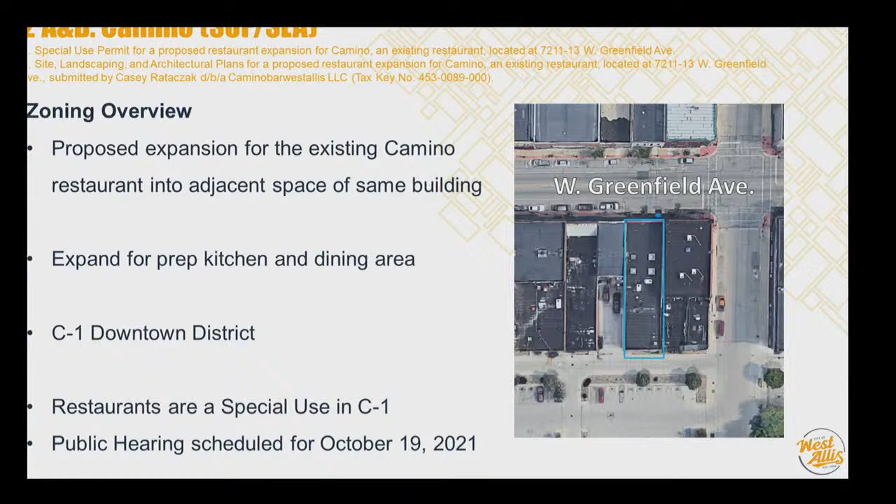They basically want to expand their room for their prep kitchen and dining area. This is within the C1 downtown district, and since restaurants are a special use in C1, they're going to have a public hearing scheduled for October 19th.

So just a little bit of history about the space. Its previous use was a vape shop, so they're gone, all of their signage is gone. And before that, it was Swords and Dreams, a reptile rescue shop where they used to sell all sorts of reptiles, iguanas, and katanas.

What else? Been working on that all week, haven't you? Well received, thank you.

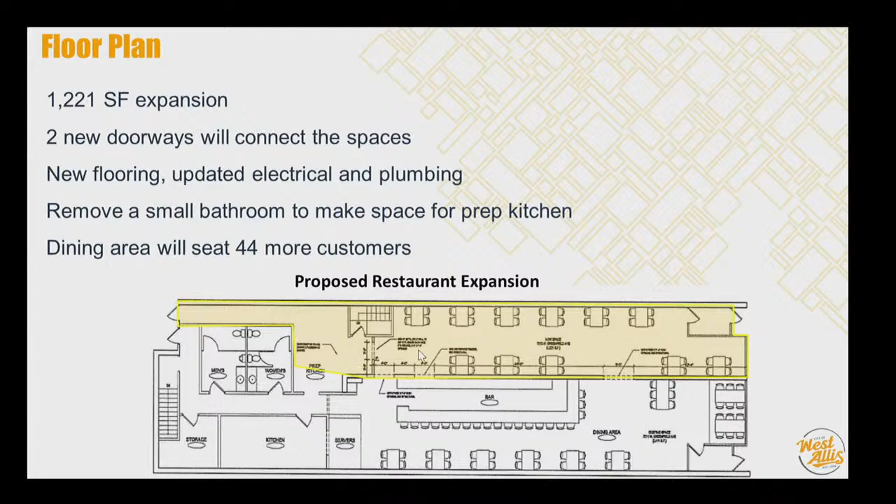So Camino's hours of operation will not be changing. Floor plan, well, they're expanding about 1,200 square feet and including 2 new doorways, which will connect the 2 spaces. In the new space, they're going to be updating the flooring as well as electrical and plumbing. And then they'll be removing a small bathroom located right around here to make way for the prep kitchen. This dining area will seat about 44 new customers.

There aren't any proposed changes to the exterior except that the signage has been removed and brought up to speed with branding for Camino, as well as the outdoor seating. So they've already moved their outdoor seating and added a few new spaces onto the sidewalk.

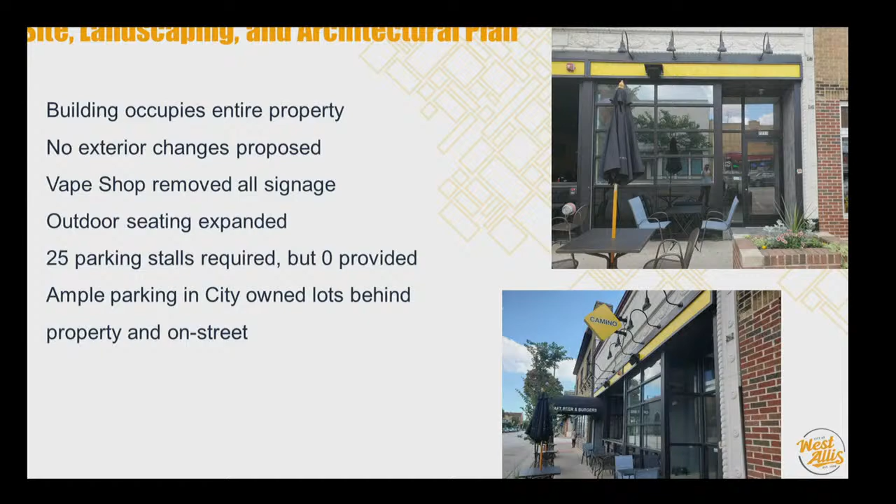The zoning code calls for 25 parking stalls, but since they are downtown, they have 0 provided. But there is ample parking around the downtown and the city-owned lots behind the property, as well as on the street. So we're asking for Common Council to waive this requirement. With that, staff recommends approval, subject to the approval of a special use by Common Council.

Thanks. Questions? Wayne? Thank you, Mayor. Tony, when we talk about the parking in the public area and street parking, and there are many other neighboring businesses that look at the same parking, don't we at some point in time have a conflict where there's not enough parking? Well, at this point, we haven't reached a point where we've reached parking capacity in any of the city-owned lots. I think if we ever do reach that, then we would have to reevaluate our downtown parking. But so far, we haven't reached that point.

And you would know that because tenants would be complaining? Tenants would be complaining, and we also keep a close eye, just being so close to everything here. We often commute down this alleyway and keep an eye on things. All right, thank you. Any other questions?

All right, so just to look at the floor plan, it's pretty straightforward. There's going to be about 100 feet by 120 feet with several different storage racks to hold the equipment and maximize the space for them. There's going to be 6 different garage doors along the eastern side of the building, as well as some service doors on the north and south.

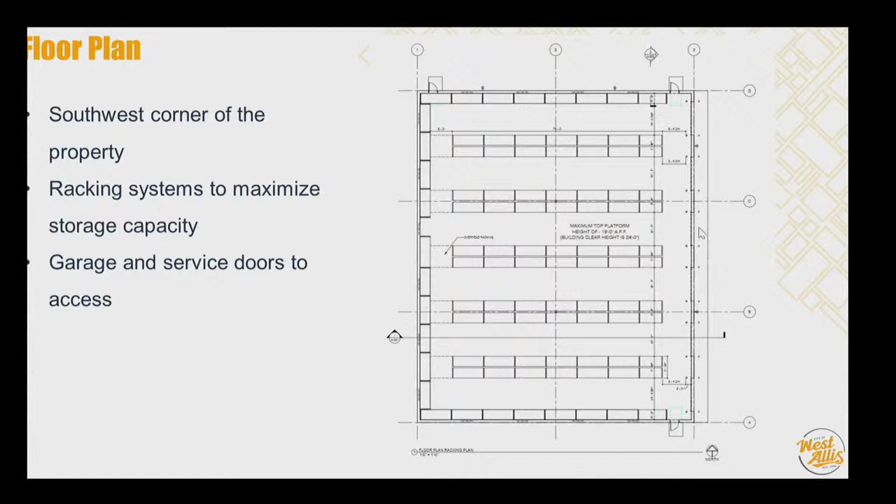Now looking at this site and landscaping plan, we worked with Lincoln Contractors to modify this a little bit and improve a few different areas, specifically some landscaping additions to the northwest corner. Some pictures of this right now.

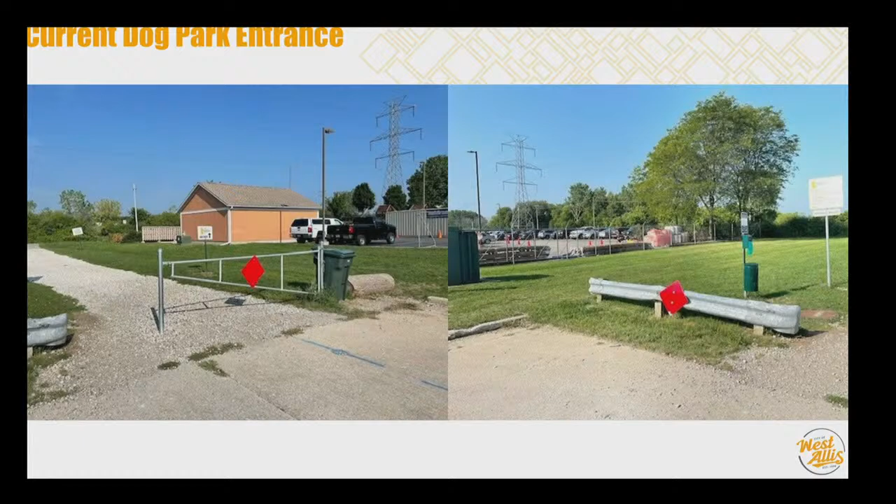This is the entrance, right next to the entrance to our dog park. As you can see, if you're walking in the dog park, you can see pretty clearly into the parking lot of this area, and it kind of doesn't fit some of the park qualities that we have there. So we worked with them to provide some amenities for people going to the dog park, including some benches on concrete pads, as well as 6 evergreen trees.

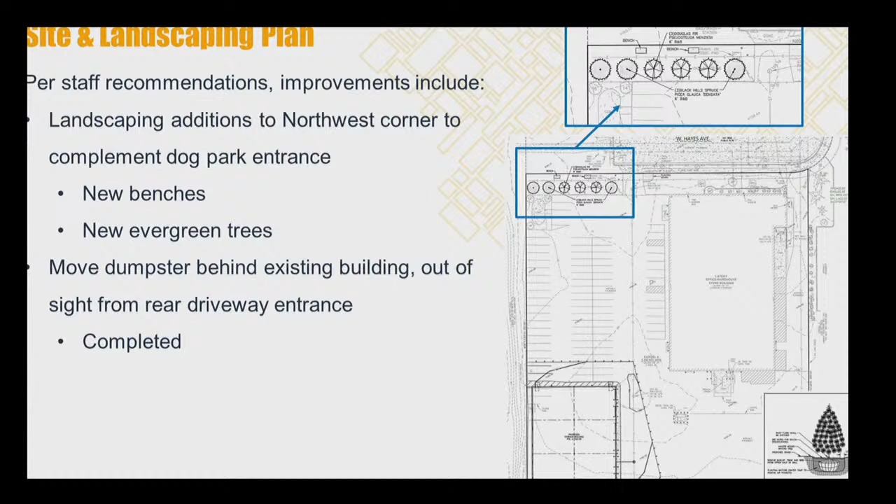The second item we worked with them on was to move the dumpster, which was currently in line with the western driveway you see right here, at the rear of the yard and kind of in sight from the street. We suggested that they move it behind the existing building to be out of sight, and they agreed, and that has already been completed.

Now looking at the architectural plan, the warehouse is going to be made from painted split-faced CMU blocks. You can see here we have the series of garage doors. Architecturally, there's this nice red stripe to break up the facade there. Above that, some lighting wraps around the building on each side. There's also going to be windows along the north, west, and south faces.

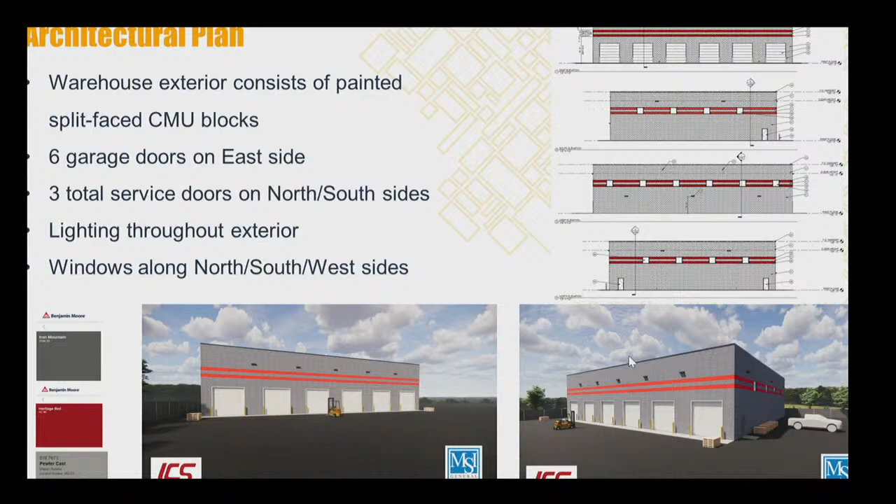Staff, for this project, staff recommends approval, subject to compliance with the stormwater ordinance. And so, yes, that's all. Any questions?

Rossi asked: How far back does that dog park go? Is it just that area right in the front? There are 2 parts to it - a small dog area and a large dog area, and in total it's about 5 acres of land. There's one entrance off of Hayes, and a second entrance off of Cleveland Avenue, which is about a quarter-mile hike from Cleveland north to the gated part of the dog park. If we had an aerial view, it's behind the police station, west of Lincoln Contractors, east of Hale, and north of Cleveland Avenue. So it's a fairly large area.

Is there a trail by that wooded area that you can use? Yeah, so there are 2 entrances to the dog park - one off of Hayes that was explained, and then another one off of Cleveland. So you could just park in the street on Cleveland near the practice fields and walk in.

So moved. Second. Any other discussion? Okay, all in favor? Aye. Anyone opposed? Ayes have it, motion carries.

Mr. Mayor, with your permission, I'd like to step back briefly to the prior item. I have a question for Tony - why is staff not requiring a surety bond? We deemed this project small enough to not require one, in terms of project costs, and they've shown good faith in making the changes we asked for, so we're not going to make that requirement of them. Generally speaking, almost always, we ask for bonds, right? Right, and if you recall at the last meeting, or maybe two meetings ago, we decided to do away with surety bonds as a requirement for every single project, and left that decision up to Plan Commission. All right, thank you.

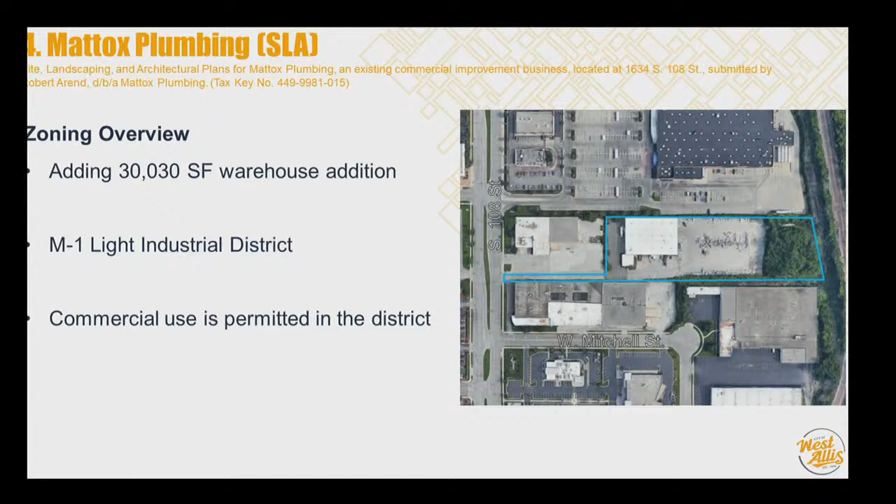Let's take up item 4 then. All right, thank you Mayor. Item 4 is Mattox Plumbing, and again we have 2 representatives from Mattox Plumbing here today with us. This project is at this address, just east of Highway 100. The proposal is to add an over 30,000 square foot addition to the existing building there, just to the east. This property is in the M1 Light Industrial District and is a permitted use. Their plan is to store some of the materials that they currently have outside in the yard in this warehouse.

The floor plan is pretty simple. This is essentially just an open floor with unfinished features added to the east side of the building, to provide some protection and additional security for these materials, which the company currently stores outdoors.

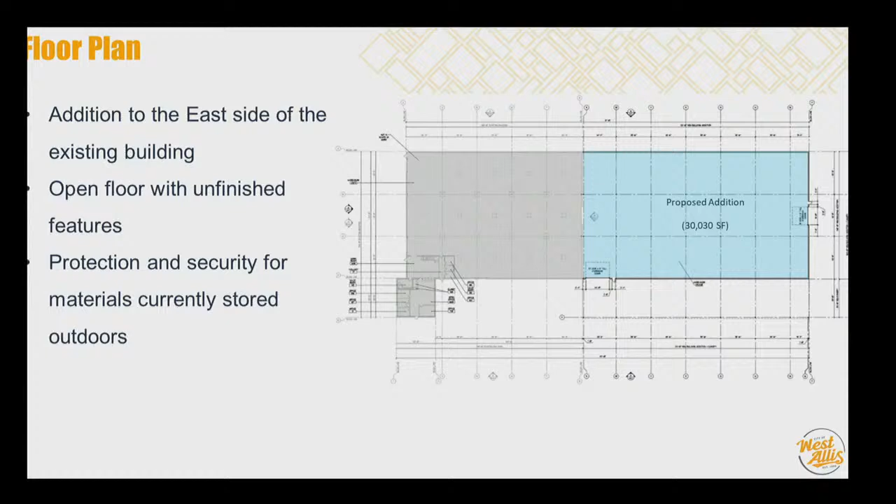Now looking at the site and landscaping plan, there are two main components highlighted here. The first is by this small office at the front of the building. There are a few different plantings there right now, and they're going to be replanting with new plants in these island medians in the parking lot, as well as on the west side of the office, plus a new planting bed on the east side.

They're adding a new planting bed to the west side. The more significant landscaping change is going to occur in the rear of the property.

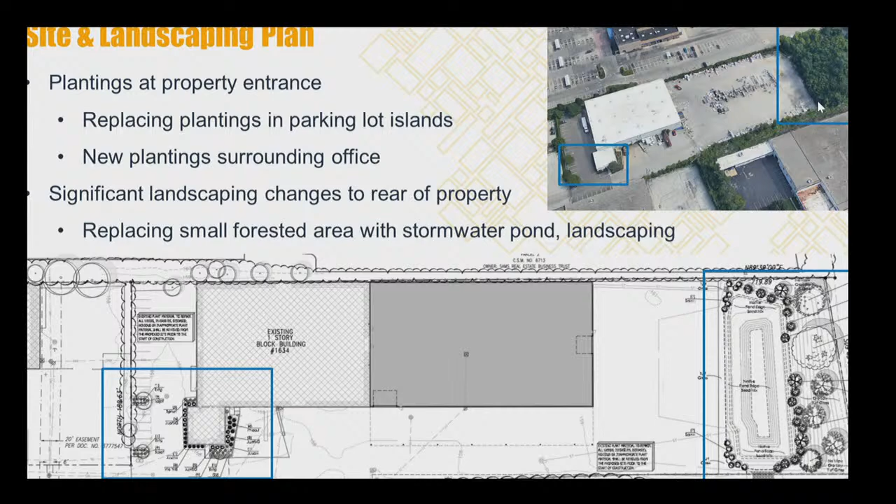As you can see from this aerial view, there used to be a small forested area, blocked off by a fence that ran along right here. This consisted primarily of box elder trees. Let's move on to get a more detailed view of their plans.

They're going to be removing this little forest and instead adding a more landscaped area, including a large stormwater pond to manage runoff from the property with some green infrastructure. This will take water from the roof and the parking lot and allow it to soak in slowly over time, managing that water.

As I mentioned, they'll be moving the existing fence that used to be right here to the east edge of the property line. Then they'll also be landscaping this area with native plants in the stormwater pond, as well as perennial grasses, shrubs, and trees as displayed here.

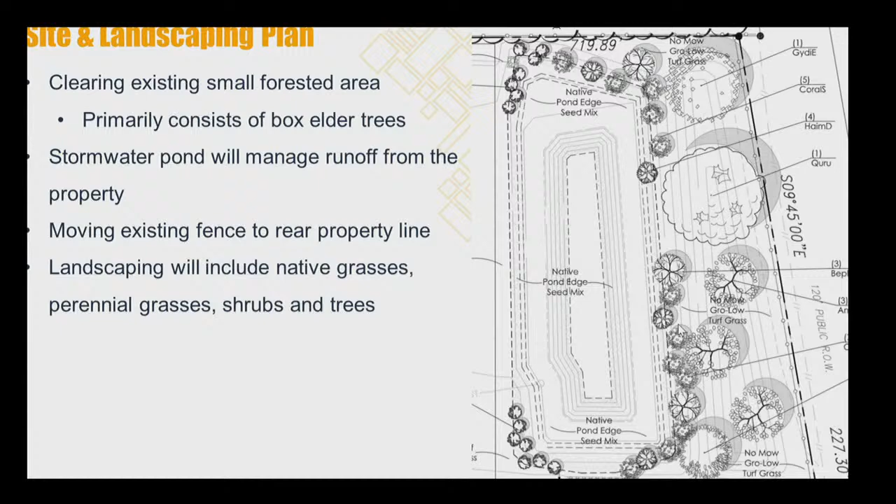Moving on to architectural plans, it's going to be another painted split-face CMU block exterior. As you can see from this elevation, it's going to be slightly taller than the existing building, about 3 feet.

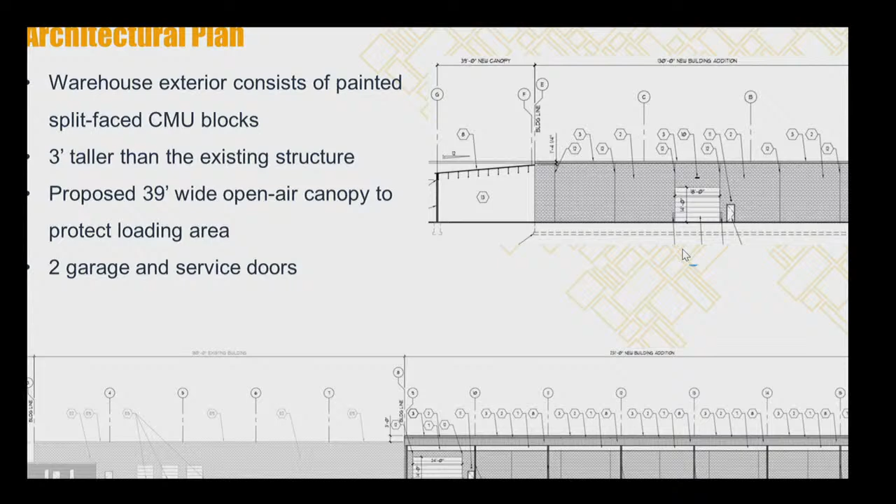There's going to be a 39-foot wide open-air canopy to help protect people as they're loading here, and also allow some space to be covered for storage. There will be 2 pairs of garage doors and service doors on the south and east faces of the building.

Now we're going to talk a bit about this frontage road easement here. In our comprehensive plan for 2040, there's a recommendation, as part of the redevelopment of Highway 100, to develop a modified frontage road system. This existing corridor is displayed in blue.

These blue streets are ones that are currently there. These green dashed lines represent current easements the city has with property owners. This current system of frontage roads with easements was developed in cooperation with property owners, specifically retail uses that would really benefit from cross-traffic connections throughout those roads.

This current building sits in a potential site for a future connection. However, at this time, staff is not recommending we pursue this easement. There are a few reasons for that.

First off, the property owners have not indicated any interest, and it would really require several property owners to make this connection through multiple sites. We think this would be better suited for a time when there's a use change in the area. This wouldn't really serve the needs of these more manufacturing-based companies either.

There's also a bit of a hindrance with how some of these parking lots and storage areas are designed, so it wouldn't really make sense to have this run through here right now. So we are not recommending trying to get an easement for these frontage roads yet.

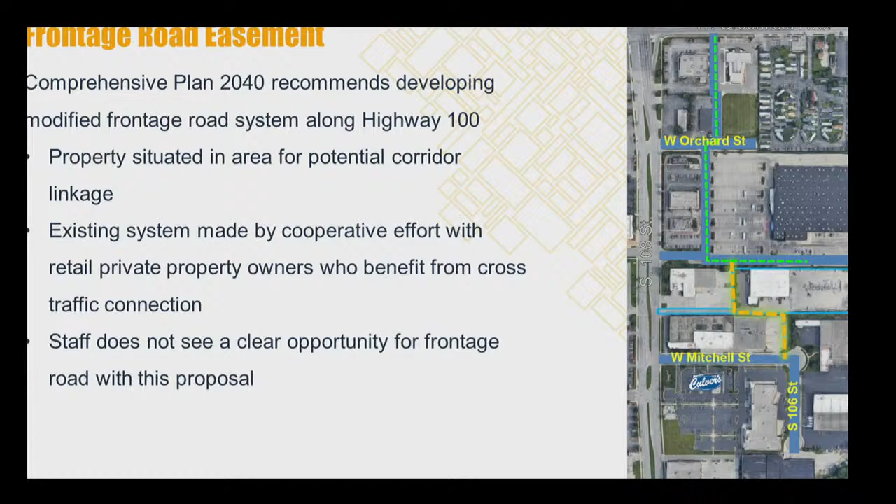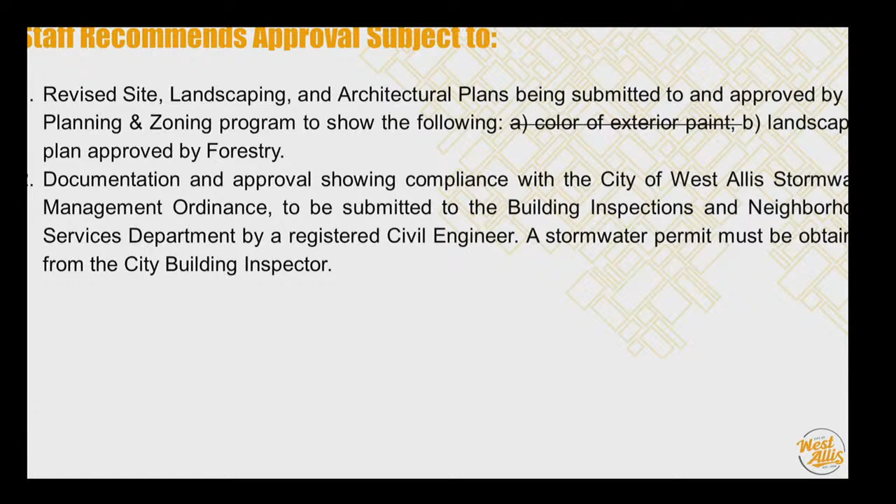Staff ultimately recommends approval, pending showing the color of exterior paint, which has already been identified as the same colors as the existing building. Then a landscaping plan to be approved by forestry, and complying with the stormwater management ordinance, reviewed by our engineers.

Thanks. Yep. Questions?

Zach, if we don't take on the connecting roadway, we're not going to have another bite at this apple for a lifetime. Is that a concern, Steve?

I guess not so much, not at this time. I think it would be a hindrance to the flow of the private property owners there, which include Lexico Tile, Mattox Plumbing, Able Distribution, and I think even Mulga. Those are all light industrial uses, and creating a private easement through those properties would really interrupt the daily business operations of those businesses. So in our opinion, it's not the right opportunity to require that as part of this building addition. It will probably have to be a longer-term opportunity down the road.

If Lexico Tile, for instance, sells their property to a retail use, then we can maybe continue that thought of bringing a cross easement across the Lexico Tile property to get to Mitchell Street, and complete that private set of easements from Greenfield Avenue south to Mitchell.

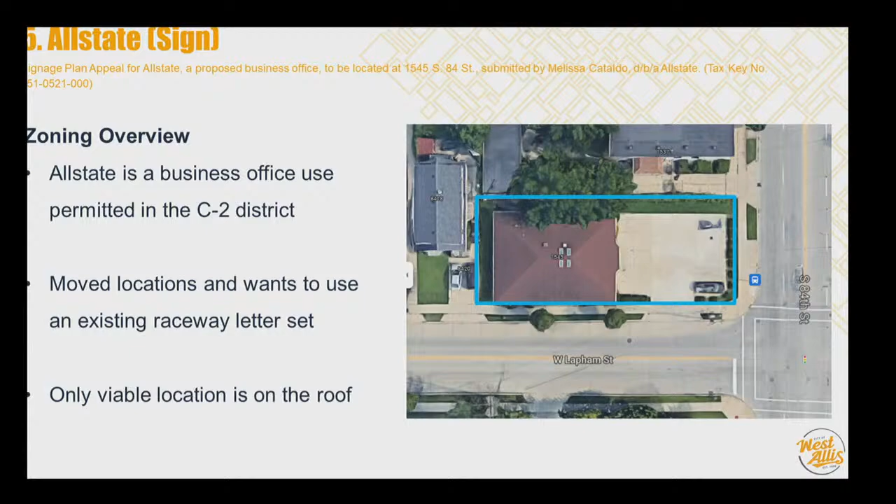Signage plan appeal. Thank you, Mayor. So this next item here is for a sign plan appeal for Allstate, an insurance company. They have a business office use, which is permitted in the C2 district. They are moving locations and want to make use of an existing raceway letter set that they have had, and want to put it onto this building somehow, but as a wall sign it wouldn't really attach well to any of the exterior facades. So they are proposing to put it on the roof.

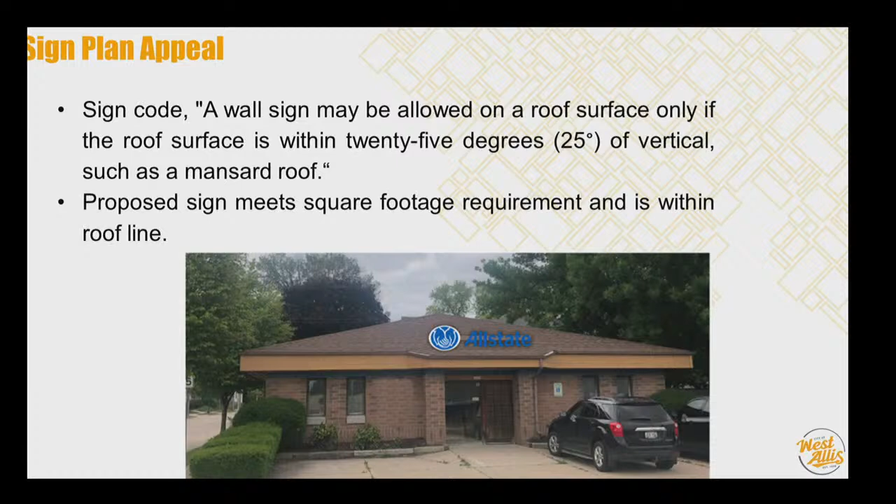So in our sign code, a wall sign may be allowed on a roof surface only if the roof surface is within 25 degrees of vertical, such as a mansard roof. This does not meet that standard, but the proposed sign does meet the square footage requirement, and it is within the roof line. That's another standard. If it was poking out above the roof line, it wouldn't be allowed.

It's still, if you look at the building head on, it has the same function as a wall sign. I think it's a handsome sign. I move approval. Second. Motion and a second. Any other discussion? All in favor? Aye. Any opposed? Ayes have it, motion carries.

We'll move on to item 6. Thank you, Mayor. If you recall, about a couple years ago, we approved a special use permit for the Lifeway Church, which is now known as 414 Church over on 75th and National. They are requesting a 1-year extension of time to complete the site improvements, with just a couple minor modifications.

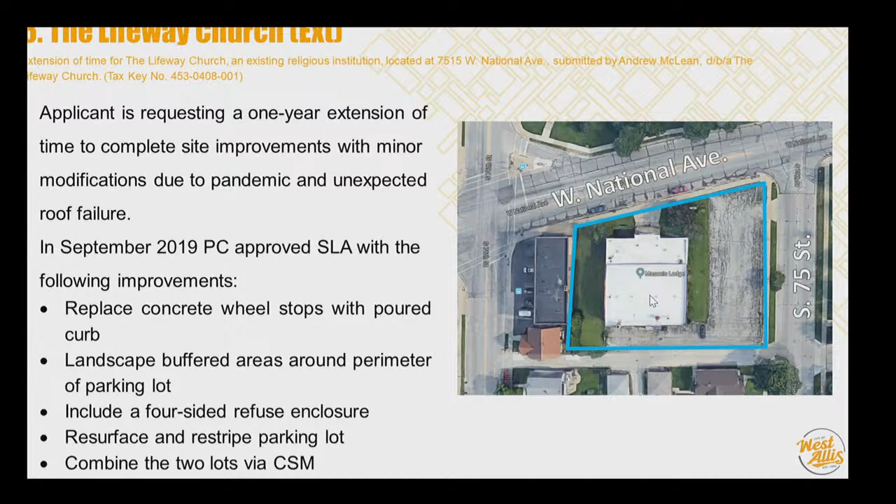So the 2 alterations they want to make are to change the location of the refuse enclosure from right about here to over here. They want to be able to store their snow now that they've experienced a winter. A similar change: they want to move the buffered area, which was more so on this corner, and switch it to over here, again for snow storage.

Staff recommends approval, subject to landscaping buffered areas around the perimeter of the parking lot, coordinating with our city forester on appropriate salt and snow tolerant species within the landscape areas, and also a schedule indicating the proposed start and completion date.

Tony, have you received the schedule yet? We have not yet. Okay, just that they want to get it done within a year. Yeah, because my thing would be, I think this would be a good project where we could have some follow-up, because on these milestones, like the refuse enclosure, second quarter 2022. My thought would be that this should be followed up with, that we revisit it once that more detailed schedule is presented. Because one of the themes in Plan Commission is about the enforcement of the plans. That'd be my thought, unless any other commissioners see otherwise, that we revisit this.

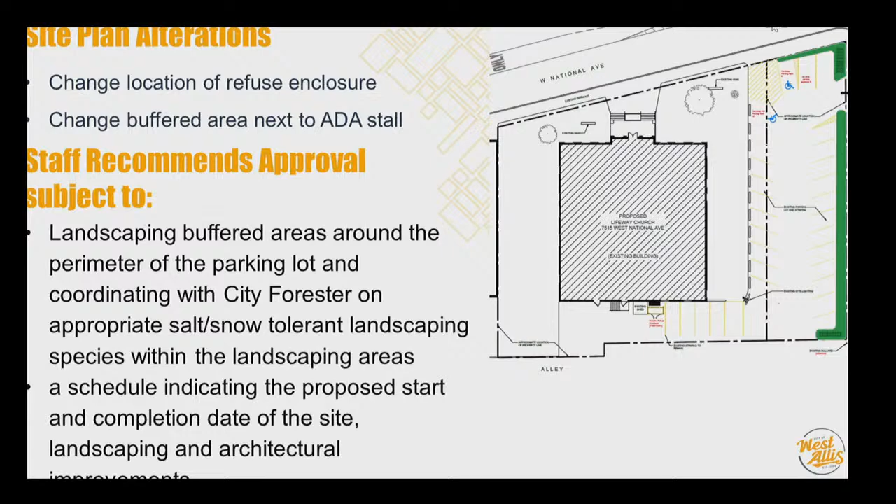Have you got a sense from them that they're still going to be on board with doing plantings there? That was definitely a concern of mine as well when they reached out about this alteration. The applicant made it a point that he's still going to include new landscaping, shrubs and perennials, but he just wants to alter this space, moving the buffered space over here. So he's still including all the landscaping he promised us back then.

Mr. Mayor, Tony, do you agree with those changes? Yeah, I think they're minor enough. Yes, I agree, thank you.

Move approval if approval is needed. That's cool.

I guess my thing is, what's going to happen when this comes up again? Is it going to be in the same position? Some of the stuff I look at, like the enclosed refuse, they haven't done that yet, but that's minor. Some of the other stuff, I understand, but minor -- right, so that's my biggest concern on this: are they going to move forward, or are we going to be extending it out in September 2022 again?

Well, that's where we'd have our follow-up. I think the first follow-up would be in April to see if the refuse enclosure has been done, and if it hasn't, then we'd have to look for recommendations from staff on how we can proceed. What would the options be? Would we then ask the council to take a step against their special use?

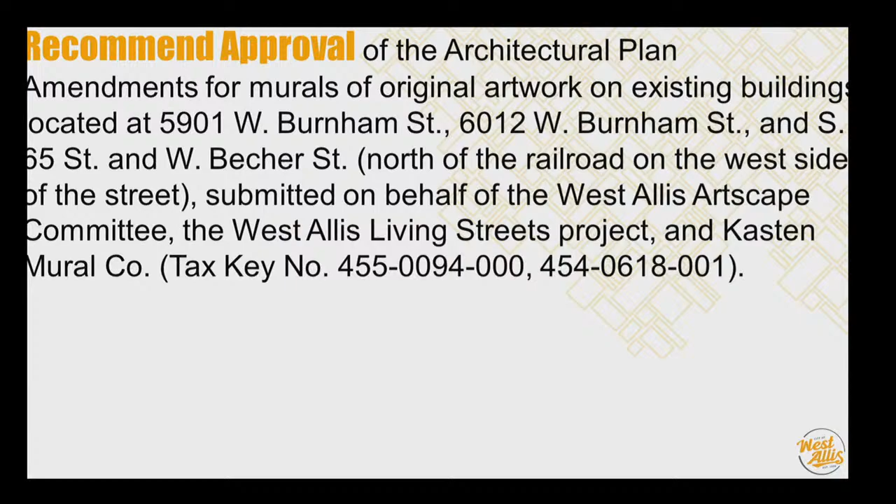That's a discussion item relative to existing and proposed rezoning of certain properties along the Highway 100 corridor. Just an update on that - we have mailed all of the property owners that would be affected and invited them to an informational meeting. We haven't heard back from anybody, but hopefully we'll have some people in attendance in case they have questions. Will it be the 29th, Tony? That's right, September 29th, Wednesday I think. Does anyone ever go to those? We had one person attend last time, and she did ask lots of really good questions. It's more businesses, I think, along that area.